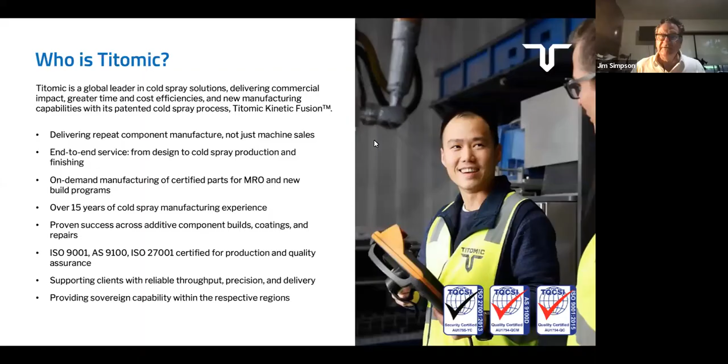I joined about 6 months ago as the CEO. We are based, as Neil is right now, in Melbourne, Australia. That is our current headquarters. We focus there on the Melbourne activity as we have the capabilities for low pressure, our 523 for coatings.

We have a medium pressure system, which we'll talk about, that's also doing coatings, but with materials as robust as titanium. Then we go to our high pressure machines, which can go up to 1.2 kilometers per second from a velocity perspective. Hence we can do refractory and titanium type materials at close to their theoretical densities.

In the Melbourne facility, we do a substantial amount of our research and development, as well as a lot of our production activities. We also do coatings there, but our focus is in the production area.

In Akkrum, in the Netherlands, our focus is more in machine building. We do a lot of coating activities. We have a program there with Airbus and others to support their aircraft activities for MRO, for coatings for non-critical flight hardware. Akkrum is also a fully capable facility with the ability to do high pressure capabilities as well as low pressure coatings, but our primary focus there is in the coating area and also machine build.

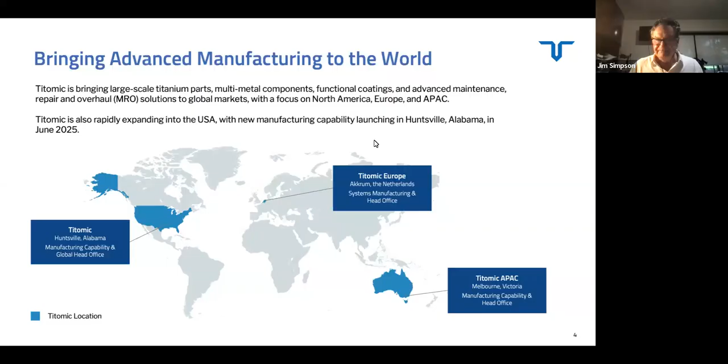From an economic efficiency standpoint, kinetic fusion is more than just a novel process, it's a national capability. It directly addresses supply chain vulnerabilities by allowing rapid local production of critical components. It extends the operational life of aging systems through superior sustainment and refurbishment. It enables faster fielding of next generation designs by removing tooling bottlenecks and material limitations. And it provides new pathways for in-space manufacturing, radiation shielding, and hypersonic system development.

Whether it's repairing a corroded naval asset, building pressure vessels for satellites, or creating thermal stable nozzles for propulsion systems, kinetic fusion is ready to deliver.

One of the key elements is that because we are additive manufacturing, our additive manufacturing really doesn't build the most complex parts in the world. We build parts rapidly, with great performance close to the theoretical properties of the base materials, and we build large parts quickly, but we do not build the most complex parts in the world, which you typically get used to with laser beam additive manufacturing and others.

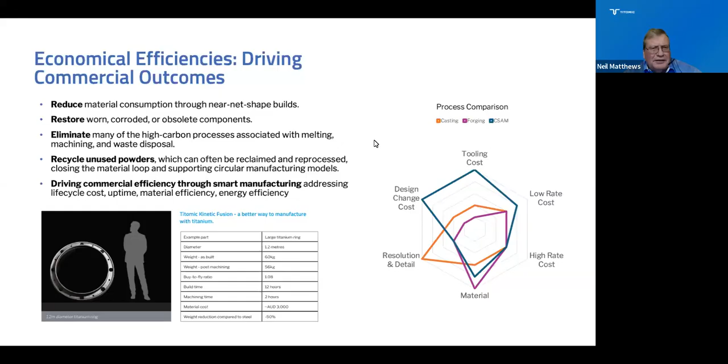To put things in perspective, we recently built what we believe is the largest part ever built by Kinetic Fusion Cold Spray, a 175 kilogram part. We built that in less than 72 hours. This is an example of how quickly we can build these types of parts at full density—a very exciting aspect of what we're doing.

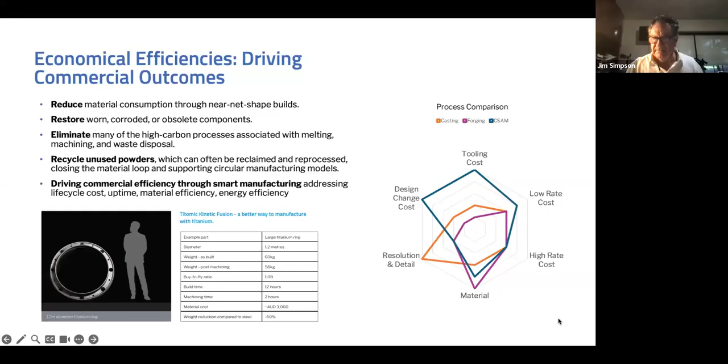Some of the things we've been alluding to, as far as the complexities we can achieve relative to our materials, is that because we don't melt the materials, we can create unique continuums—going from a base material to a gradient in which we can move the coefficient of thermal expansion, from a very malleable material to something like a metal matrix composite or metal matrix ceramic capability. This allows us to do unique things relative to radiation hardening, ballistic armament, and other applications. We're really quite excited about that kind of capability.

Because we're able to do these types of mixes, we're able to create very lightweight, very wear-resistant parts, and we're able to do this at speeds others cannot match. Our ability to mix different powders and utilize different powders is quite unique as well.

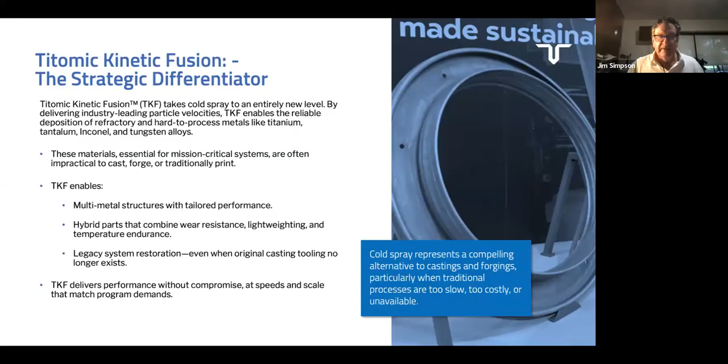So we've been talking a little bit about some of the things that we're capable of looking at, and some of the different types of capabilities that we're able to have.

Kinetic Fusion's already delivering impact across multiple sectors. From a defense perspective, we're creating lightweight, corrosion-resistant structures for aircraft, ground vehicles, and missiles, plus sustainment of legacy fleets and rapid prototyping of advanced concepts. In aerospace and defense systems, we're producing radiation-hardened satellite components, micrometeorite-resistant coatings, and pressure vessels built faster and stronger for orbital and deep space missions. In maritime and infrastructure, we provide corrosion mitigation for naval fleets, barges, and port infrastructure, dramatically reducing life cycle costs and downtime. And in energy and heavy industry, we repair and reinforce critical systems operating in extreme environments such as oil rigs, pipelines, and power generation.

The reason I bring that up on this powder technology activity is that we're able to tailor the powders and the types of pressures we apply based on the different machines we have, and also the different types of powders we're able to utilize. We recently signed agreements with five of the domestic providers of titanium powders in the United States, all with varying types of powders that we're certifying through for Titomic.

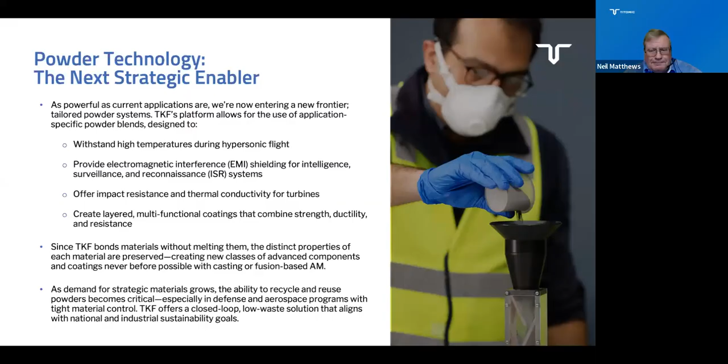We talked about the domestic powder suppliers. One of the things we've been very concerned about, as the United States moves toward a more protectionist environment and we're doing a lot more onshoring, is how we make sure we assure we have these kinds of capabilities in the United States, as well as in the Netherlands and Australia. Having this domestic powder supply collaboration has been a very essential key for us.

I think what we clearly identify is that not all powders are the same, even though they may look the same and even have a reasonable pedigree. No, I would say no two powders are the same. So there's a lot of work and understanding required to utilize these powders to their optimum. That's why it's so important to identify a range of powder suppliers, because within that basket of powders there may be different powders from different suppliers that we can use to achieve different outcomes.

Yeah, and we're talking about the U.S. here, but we've been engaging with the Australian government and European governments as well as the U.S. government to certify and qualify our Kinetic Fusion process for defense and aerospace qualifications. In fact, we recently started the certification process with DNV for maritime and oil and gas activities, as well as working now with NASA and others to try to provide certification for our processes. This is an ongoing activity - a collaboration. We're partnering with primes and also with our suppliers to enable this type of certification so that we can work on programs of record and not just be doing R&D.

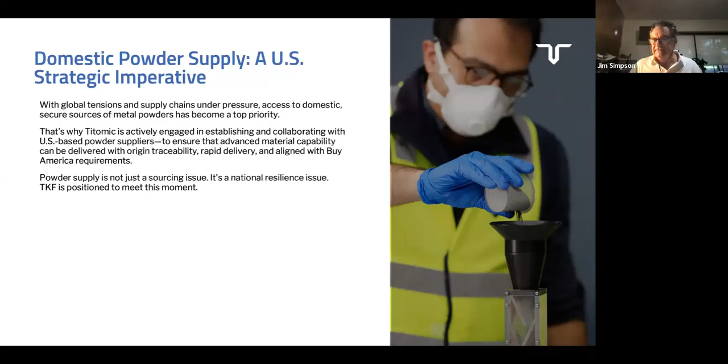So where are we as far as technology readiness levels? Because we've been talking about how we get certified in production. We have a variation in the different types of TRLs in multiple applications for commercial and government pilots. We're at a TRL level 6 or 7. In other cases, we're at TRL levels 3 to 4. But we do have one activity that we've been doing with the Australian company Spirit called the Hermes satellite, in which we developed a thermal radiator that's been flying in space now for over 2 years, which is at a TRL level 9. So there's a lot of variation as far as the different TRL levels, but we're trying to mature the process as quickly as possible. And Neil, maybe you'd like to talk a little bit about that.

Yes, again, it's one of the elements of engaging the customer. We certainly do that a number of ways. Where we are very, very close, we obviously engage the customer for trials, and we certainly see that on the space programs. We've got items in service that have been repaired and those sorts of things. So that's basically to just go to that last step. But we also have collaborative programs with universities, with research agencies and things like that, to basically accelerate those ones that are at 4, 5 and 6, to accelerate them so that we can go straight into the commercialization. So those agreements are such that when we engage in these collaborative agreements, we always focus on ensuring that the whole program of development is focused on the commercial outcomes and their industry requirements.

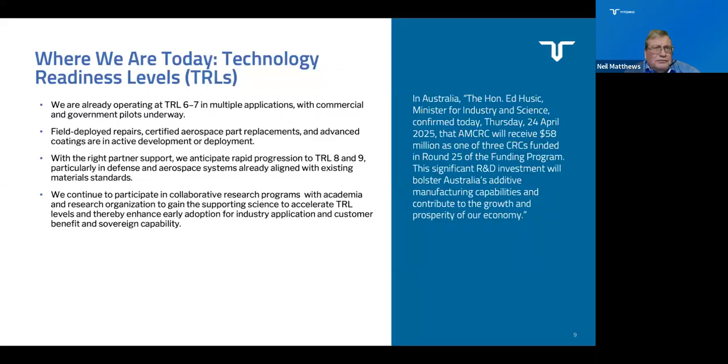So there's a thing called the Valley of Death, and we hope we've built bridges in many cases to accelerate that. And I think that's one of the programs that we're working on now in Australia, which has just been announced, which is a large AM, additive manufacturing collaborative research program. I think it's about nearly $200 million, which is a lot of money for Australia. But certainly the important thing is there to work with end customers and the academic and research, so that we can work collectively in parallel to reduce the TRL maturity timelines.

Thanks, Neil. And we're taking that model that Neil just talked about and moving that to the United States at our global headquarters at Huntsville, Alabama. We are building partnerships with the primes, the national laboratories, NASA, and the DoD. We're advancing the material qualification efforts through collaboration with universities such as the University of Alabama, Huntsville, and also with NASA Marshall. And we're developing certified manufacturing capabilities to support critical programs across aerospace, maritime, and infrastructure sectors. So this is an ongoing activity, one of the areas that we're really focused in on at Titomic.

So, part of the certification acceleration, how do we go faster and how do we make sure that we're doing the processes correctly? As we've been talking about a lot here, we have been doing a lot of collaboration with the prime contractors and with government agencies and international agencies to get the certification process going as quickly as possible. One of the other aspects that we're working on right now is how do we assure that our processes are mimicked appropriately across the industry. And if someone is utilizing our machines, how are we making sure that we're actually getting the right products out?

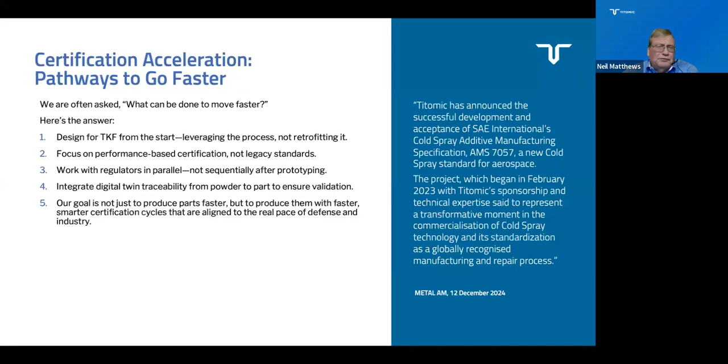We talk about the powder supplier, and all of that's there mainly to be able to transition between sites as we grow and as the need arises, because I think most of us that understand quality at the moment would understand that AM is parameter driven, input parameter driven.

What we're trying to do is to make sure that as we develop machineries, we use technologies to monitor output and use that, hopefully in the future, to be able to assure quality, because that'll be a continuous record gathering. But as I say, from a global perspective, it's so important that we all do the same thing and are able to transfer things easily. And that's all part of the certification process.

Thanks, Jim. Thanks.

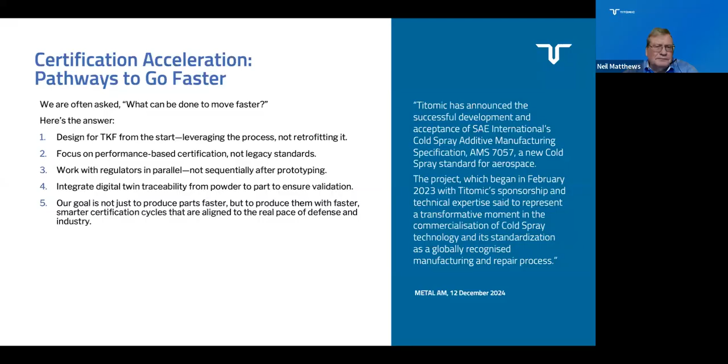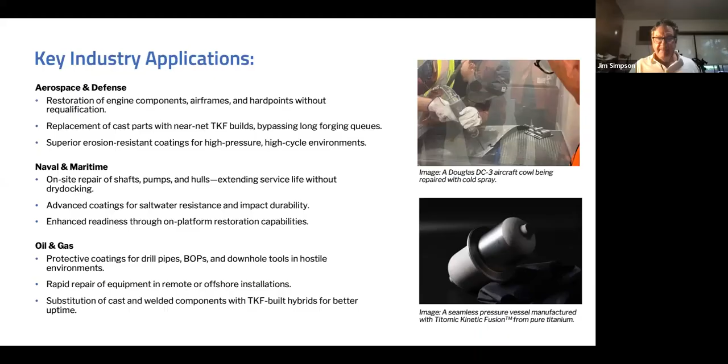We talked a bit about the MRO operations as well as some of the things in the energy sector, but in the MRO area, we're seeing that the ability to repair materials back to their base material for aviation has become something quite exciting. What we're seeing is the evolution from non-flight critical hardware to actually starting to look at some flight critical hardware for our operations. Right now there's one company already using our system for their MRO applications, and we're in the midst of the process to certify the process for Airbus for use in their MROs. We're quite excited about this area. We're working with all of the major aircraft manufacturers for their MRO applications and doing the training and making sure we control the properties such as the powders and the training as well. This collaboration with different aircraft manufacturers has become an area that we see growing quite a bit in the near future. Neil, maybe you'd like to comment a bit.

Yeah, I think that's very true. What we would hope to see, and we think it will happen over the next few years, is the move from non-structural or non-load critical repairs into other repairs. We see that happening. We fully understand that we will need to provide damage tolerant and durability coatings and all those sorts of things - there's been many papers written on how effective that is. The other element I'd like to mention on the MRO sector is we've had the 523 in operation in Ukraine through our Netherlands activity. The reports we're getting back are that they're using it very, very effectively. Obviously we don't know exactly what they're using it for, but it highlights the opportunity of the technology - that you can take it into theatre and use it on the target. That's very, very encouraging as we go forward.

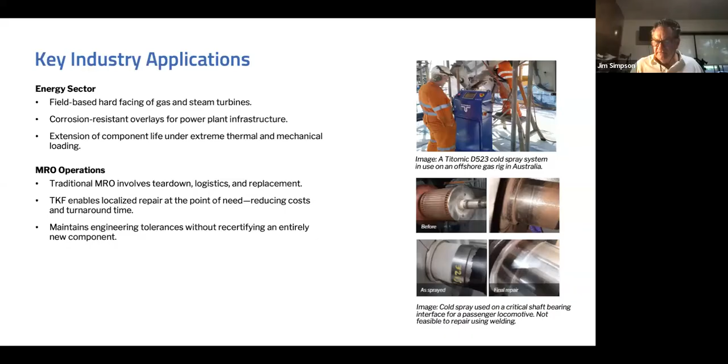We've talked a bit about the diversity of our cold spray systems. Like we talked about in the field, in situ, we're able to use our mobile machines - the lower and medium pressure systems for the D623 and the D523. These are for the more malleable metals such as copper, aluminum, nickel, stainless steel, Inconel, and others. We can actually go up on the 623, because of the pressures, to titanium. We do have controlled spray booths with robotic capabilities to have more precision.

We then move to the higher pressure machines, the TKF 1000, and then we have a TKF 325. This is pretty scientific - the 1000 and the 325. That means the TKF 1000 happens to be able to do parts of about a meter, and the 325 means they can do 3.25 meters. So we spent hours and hours on naming these machines, being sarcastic, of course.

We have actually built a custom machine with up to a 9-meter capability, so we do have a lot of flexibility. What we talked about is the large parts, and Neil brought that up as well. The 623 and the 523 really focus primarily on coatings, layers like that, whereas when we go to the TKF 1000, 325, etc., we're focusing more on production.

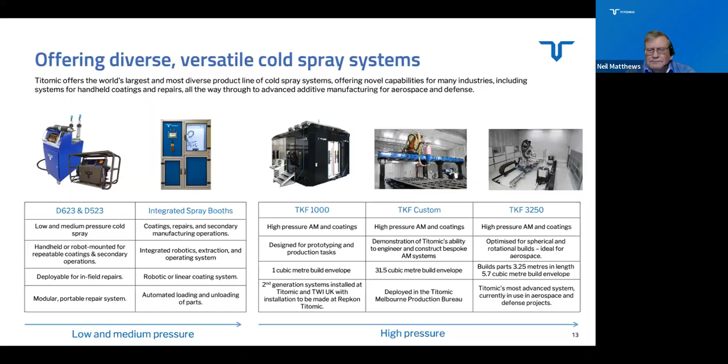So we've been talking about some of the key elements that we're really focused in on, in the powder innovation - obviously looking at different types of powders, all the way from titanium sponge to spherical powders. We're looking at different blends of powders to be able to create very unique materials for tailored applications.

We're working very hard to make sure that the processes are very repeatable. If there's one thing we're really working on dramatically, it's to make sure that the parts we're building are repeatable, because that's absolutely essential for the different markets that we're focusing in on.

We've talked about how we make sure that we can share our data, and also that we can be assured that we're following processes. So we are very focused on getting certified and following standards.

And right now, Neil's talked about it a little bit with what we're doing with the universities, but we're working to develop courses for the technicians to be able to utilize our capabilities, as well as developing the R&D that's required for some of the powder activities, as well as how we apply it with different pressures, different velocities, and how we reduce thermal stresses in the systems.

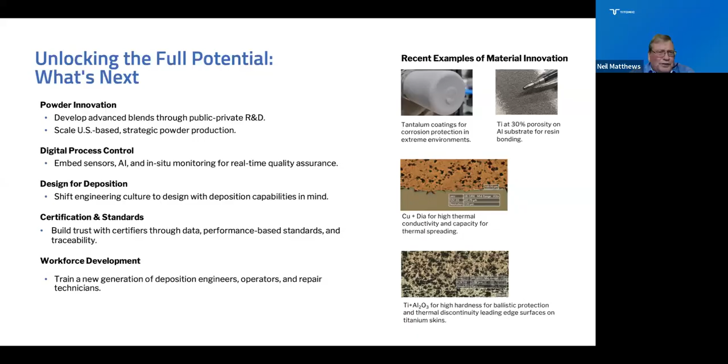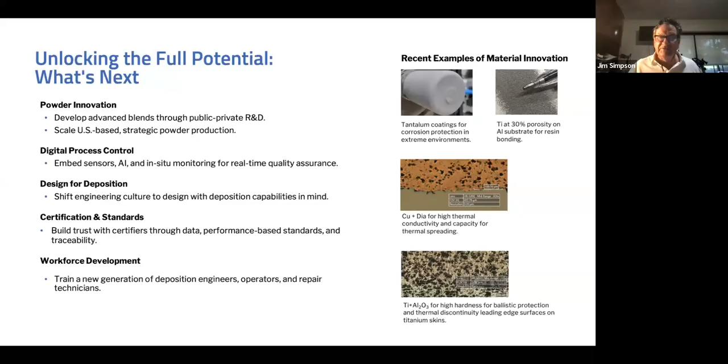So it's a very difficult question to answer, what's next, because we can only go where the technology will take us, and it's already taken us a long way. You think of all the infinite different types of mixtures we can create, and we're actually now focusing on things like Scalmalloy and other super alloys for powder metal activities as well. It has been extremely exciting, and as Neil pointed out, with the mixed reality, we're starting to focus more and more on our artificial intelligence applications as well.

In fact, we did talk about this already. I'm not sure, Neil, if you'd like to add a little bit more, but we have been really focusing on making sure that we're more consistent, that more people can use this appropriately. But Neil, maybe you'd like to add a little bit.

Yeah, I think one of the elements here is that we often get asked, can we, or what if, and those sorts of things. What we're now finding is that we're getting very, very close to being able to model, because if you look at the fundamental element of accelerating particles and transitioning to kinetic energy and things like that, we are becoming closer and closer aligned to some of the digital twins, the virtual, and the visualization.

I think that's one of the most exciting things, a lot of work's been done, and it's been done all around the world. We're doing it in two places, and I know a lot of it's been done in the US as well. But we are very, very close to having very, very high predictable models.

And even those models now are extending into the ability to predict density, some of the mechanical properties, and those sorts of things. So once you look at the ability to visualize without going through a huge amount of samples, samples will be there to validate the models, not the way we've seen it in the past, where we create models on the basis of what we achieve. So we're very, very close to being able to integrate that into the whole process, the tool path, the virtual twins, and all of those sorts, which is very exciting.

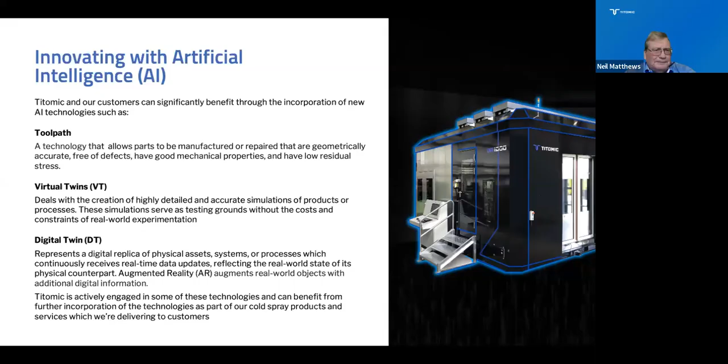Thanks, Jim. Yeah, no, that's great. And so, in closing, Titomic believes that kinetic fusion represents a transformational opportunity, a way to build faster with better materials, greater resilience, and lower life cycle costs. A way to ensure security, self-sufficiency, and competitiveness on the U.S. industrial base, and a way to unlock innovation across defense, aerospace, maritime, and beyond.

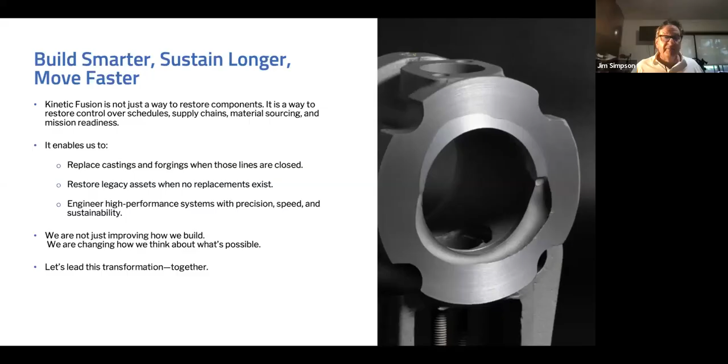We're proud to lead this charge, and we're eager to partner with many of you to deliver the full potential of kinetic fusion. On behalf of Neil and myself, thank you very much, and we're open for questions.

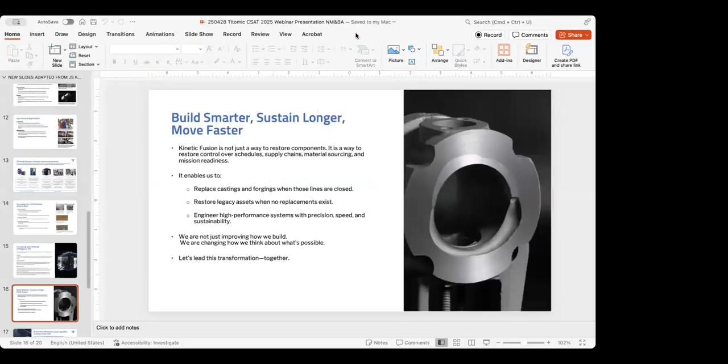So the first one surrounds qualification and the approach for qualification in high performance and regulated applications. What has been your strategy and approach to actually get something qualified for an application like critical hardware? How are you working with the customer with a process that, like you said, doesn't have a lot of public standardization or experience around it to actually do that?

I'm going to start, and then Neil will correct me appropriately.

At a very top level, we are getting our materials qualified. In fact, in some of the primes activities, we're actually working towards being an enterprise process, but that takes time. A lot of material property data - how do we make the processes uniform, consistent, and predictable? The problem with the primes is that each will certify it, but only for them, and we can't share that data across the board.

So in parallel, we're also working with government agencies such as NASA and the Department of Defense, to be able to qualify our system so that we can share that data broadly across the entire community. So we're doing both in parallel.